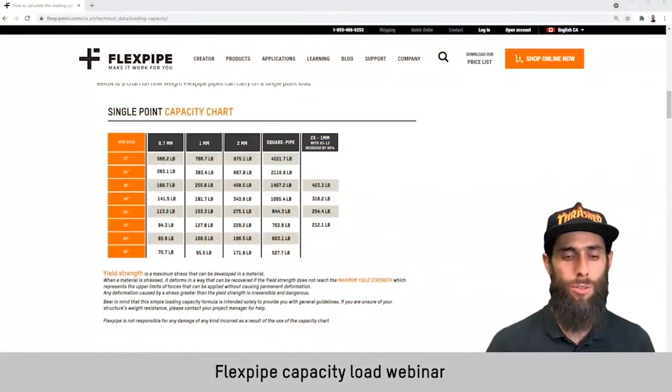So this is what we're trying to figure out using the new tool, which is the single point capacity tool, right? So here we can have the known length. It's all about how much information you have in order to be able to safely build, okay? So the more information you have, the better off you are. So square pipe, 1 millimeter, 2 millimeter, and then the stainless steel are the options that we have available.

So for example, length 48 inches, I press enter, and then I can see that I can hold 191.70 pounds on this particular length, okay? When I'm looking at an example like this, if this is my length, I need to figure whether or not I can maybe shorten this length in order to be able to add more weight, or is this length okay for the amount of weight that I'm using. That's kind of the basic 1, 2, 3 of that, all right?

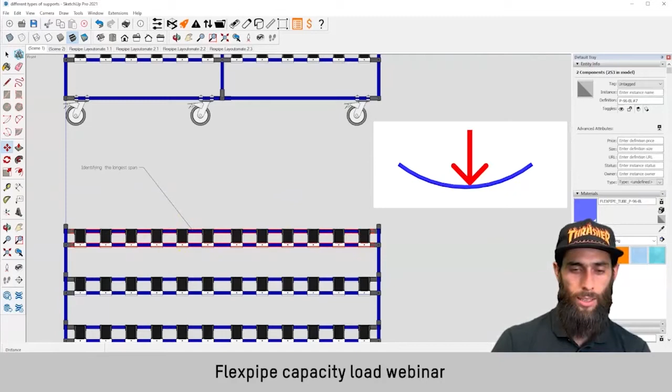So if we look at some of the structures, we need to understand what happens when we put a good amount of weight on the structure. So for instance, when we're looking at identifying the longest span, at such a long length here, it's very likely that those two pipes are going to begin to deflect and bend down on us. So we need to figure if the amount of weight that is going on top is okay for the two spans, or do we need to add more support?

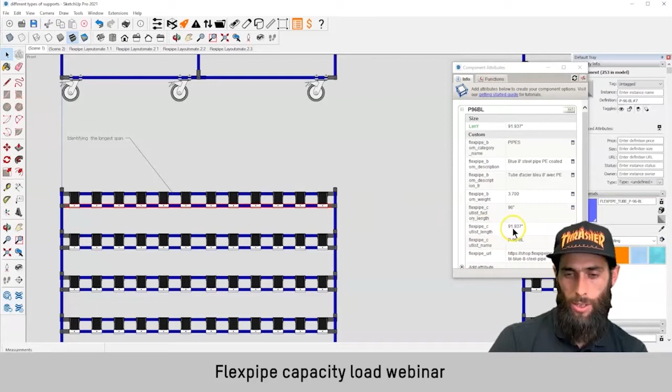So for instance, let's say I have 300 pounds that I want to put on top of this first level here, right? We're going to be feeding boxes. Eventually, it's going to get up to 300 pounds. So first thing I want to do is open up my component attributes. I'm just going to click here to see whether or not that is possible. So right now I can see that the length here is 91.937. So if I type in 91.937 and press enter, we can see that I can hold 100 pounds.

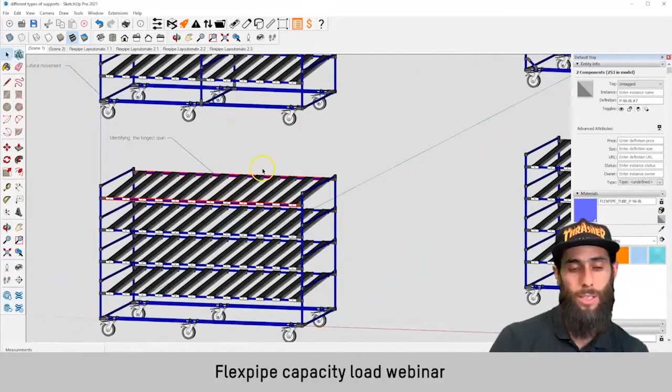All right, so let's go back to that and see what that means. That means that right now I'm able to hold 100 and 200. So right now I can hold 200 pounds in this particular setup. But again, we're talking about holding 300 pounds, so it's not going to be enough. It's not adequate enough for me, okay? That means that I got to think about something. So my next thought is, do I have the space to add another section? And by doing so, we now have shorter spans to hold that particular amount of weight.

So in this case, now I need to check what the length of this one is. And this is 44.5, okay? So let's look at what just happened. We grabbed the long span and we divided it in half so that now we have 44.5. So let's go here and type in 44.5, and then we can see that we have 206.78 pounds that we can hold in this particular length, okay?

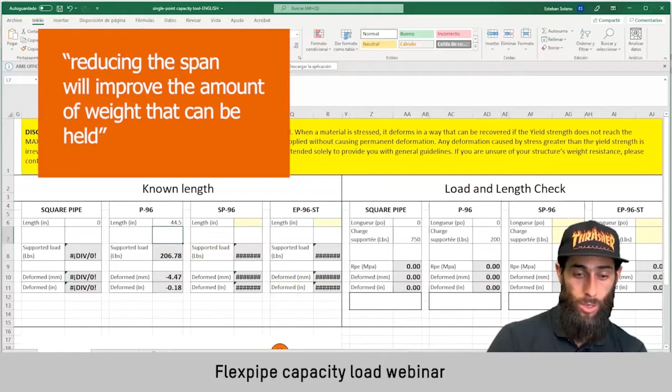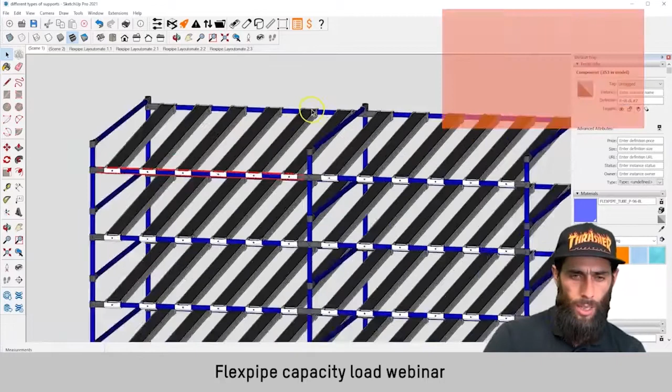So what does that mean? My original thought was that I wanted to hold in this top section here 300 pounds. So now that I know that, I can grab the 44.5, let's type it in here, 44.5, and we can see that we can hold 200 pounds, all right? So if we go back to that structure, remember, we're still dealing with 300 pounds that we want to put on top of that, okay?

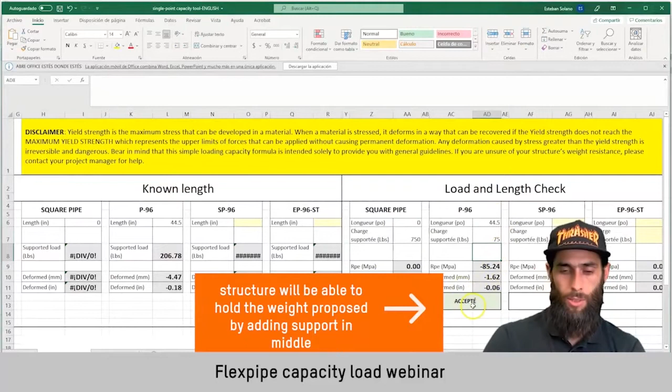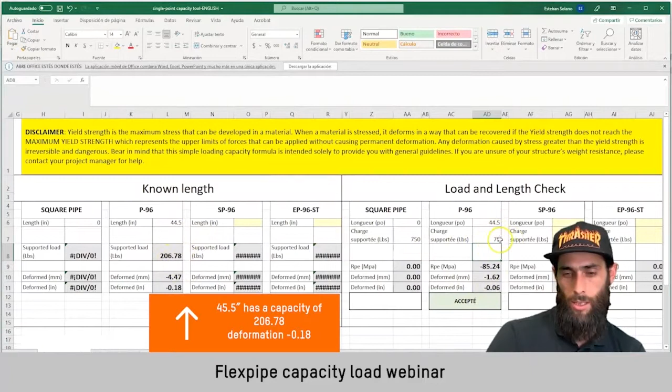So now we're going to divide 300 pounds into, let's see, 1, 2, 3, and 4. So 300 divided by 4, and we get 75 pounds. So essentially, each one of these will be able to hold 75 pounds. And we are definitely sure that 44.5 can hold 75 pounds, right? So we're definitely well beyond what is accepted. Remember 44.5, the maximum is 206 pounds, and we need a 75 pound weight load for each one of these sections here.

Okay, so in this scenario, we checked in okay. It's just more or less now, what are we thinking? Okay, so what if there is 300 pounds on this one? What if there is 300 pounds on the second, on the third, and on the fourth? Okay, so that is 3, 6, 9, 12, right? So now we're talking about 1,200 pounds in total. So that is a lot more weight than just the 300. So what does that do to the overall structure?

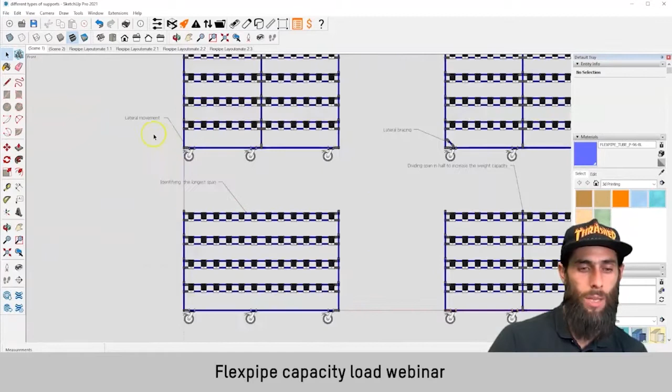Again, if we have a good amount of weight, chances are that the structure, if it's a mobile structure, is going to want to move from left to right. So one of the things that we can think about there is maybe adding lateral bracing in order to be able to create some kind of bracing to prevent it from wanting to move left to right, such as the case here. This is an example, right? We're using a short, tight angle here in order to keep those two from wanting to move away from each other, okay? That is one thought.

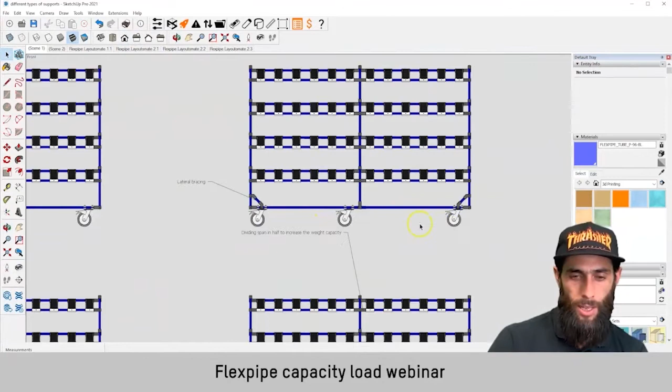Another thought is also to think about what happens to that weight front to back, okay? So that weight now, if we wanted to move it, there's a good chance that it's gonna wanna move the structure front to back with a good amount of weight, okay? So again, we're using diagonal support. So we're using a pipe in the middle along with the diagonals here to basically prevent that from wanting to move back and forth.

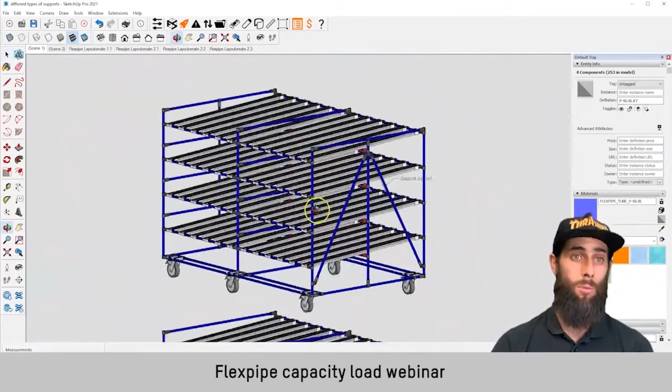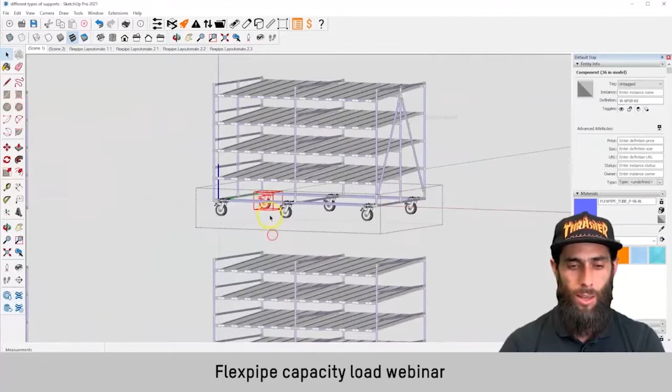And then if we have a closer look here, we also added a pipe in the middle, which can only re-emphasize what we already know to be true, that the structure itself is going to be able to hold that amount of weight. Now, the final thought is, can all of this weight be handled by the casters I am using in this particular scenario? That is really what we need to understand. In this case, yes, we have casters that can hold 500 pounds each. So we have 1, 2, 3, 4, 5, 6 casters. So yes, we can hold that amount of weight.

Another option here would be to maybe think about using the bottom base here instead of using the standard tubing, right? So right now, the pipe that we have here is the 1 millimeter. So perhaps if we look at that dimension, 91.37, and then we have smaller ones here as well that are going to also have a good amount of weight to carry. So let's look, same thing, right? 44.5. Let's have a look and see what 44.5 can hold on the 96 and then what it can hold on the 2 millimeter pipe. So basically we can hold 374 pounds on that 44.5, right?

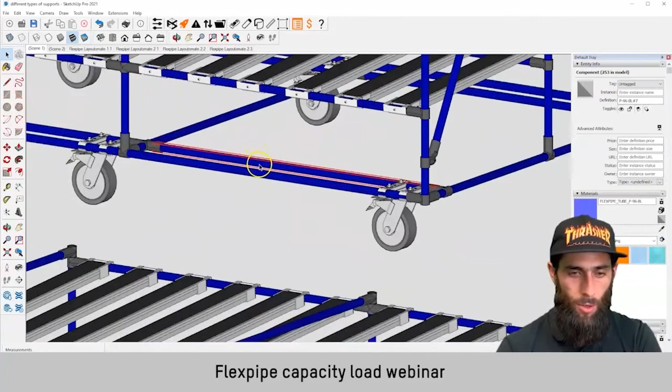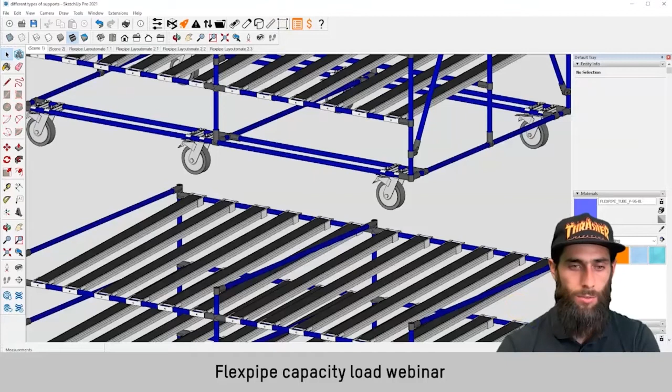So let's go back. So 374, 1, 2, 3, 4. So 374 times 4 gives us 1,496 pounds, okay? So we can hold the amount of weight that we need to. Maybe it's a matter of changing that bottom section of this particular structure here. Let's zoom out. So do we need to consider adding the 2 millimeter base in order to strengthen the overall integrity of the cart? Things to think about there, all right?

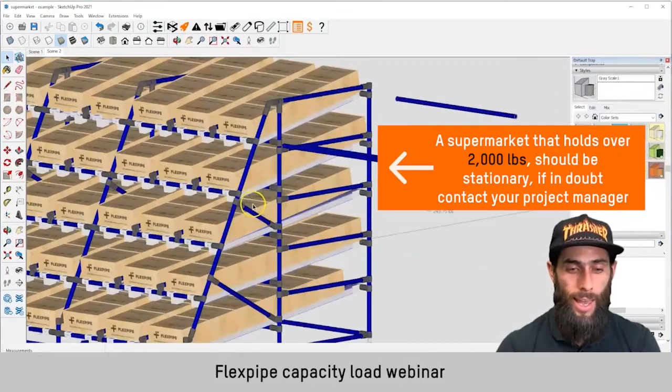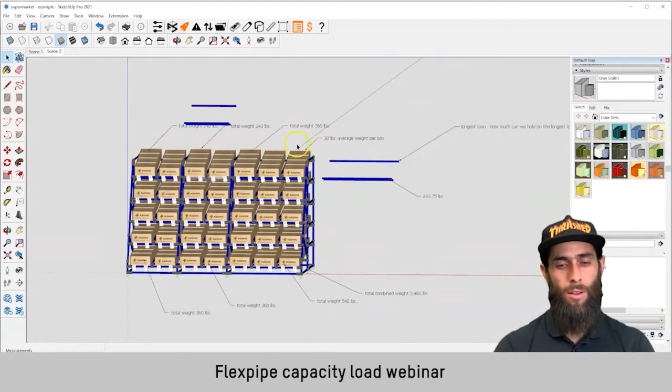Let's go ahead to another example that can be commonly seen. Again, this is the supermarket rack that we have here. It's been about 10 years and it's still here, hasn't moved an inch. It's stationary, it's got diagonal support, and it's basically not going anywhere anytime soon. So for us, each box can hold about 30 pounds on average. So we have three separate sections in this one here. Again, 360 pounds, 240 pounds on the first layer. It's a good amount of weight, so we need to figure out how to distribute that.

So in this case, we're using the longest spans, and we have 3 of them that we need to work with, okay? So 3 spans, and simultaneously using the component attributes from the window here. So we can see that 243.75. So 243.75, I have a total here of 360 pounds, which I need to account for. So I'm going to come to the calculator, because what I want to do is figure out how much I need to divide, right?

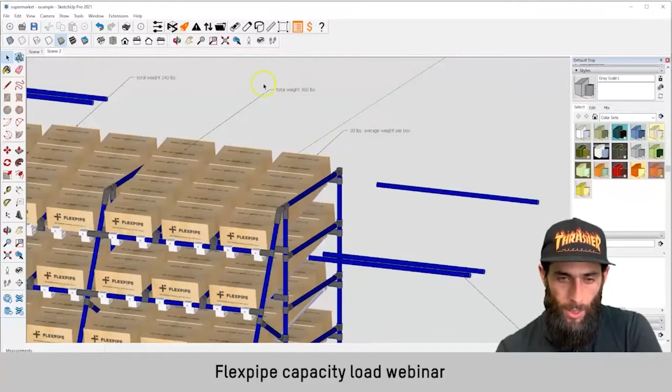So let's go back. Let's look at this here. 360 pounds. I want to divide that into 3 spans, right? I have 3 total spans in which I want to hold that amount of weight. So here we go. 360 divided by 3 gives me 120 pounds. Okay, so if I go back, I understand that I'm well within what I'm capable of doing, right? So here I can put 120 pounds.

And actually, let's go back just to make sure that that's the right dimension. Let's go back here. This dimension here, I believe it's 37 3/4, right? 37 3/4. Okay, so 37.75, 120 pounds, accepted. Okay, so in this case, the thought process, what I'm doing here is, can I hold 360 pounds on 3 lengths of pipe? The answer is yes, I can.

Okay, so if we just go over what we just did, we divided 360 pounds by 3, which is the number of spans that we have, which gives me 120. So again, if I typed in my weight in this case, 120, I get the accepting green light. All right, so that's good for that one there.

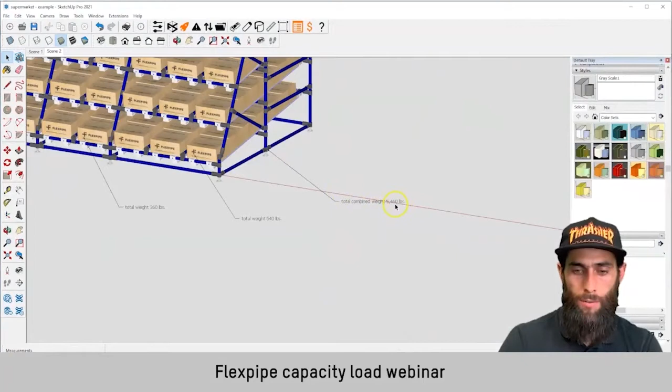Okay. Same thing. So let's see, what does that mean on the bottom? On the bottom, again, we have a total weight of 5,460 pounds. All right, so that is a good amount of weight. If I'm looking at the bottom total weight, 540 is the main section here, which I want to make sure that I can hold. So again, I look at that long 37 3/4, and I divide 540 into 3 spans, right?

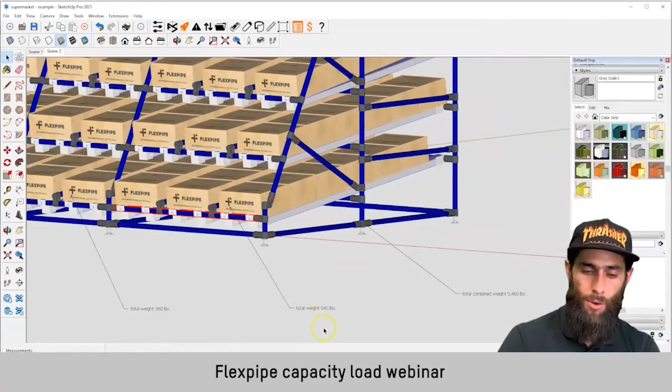So 540 divided by 3, 180. So if I go back to here, let's type in 180, and again, we have the go green light for that one. Okay, so that's how we utilize that single point capacity in order to understand how much weight we are capable of holding in any given structure. Again, the more information you have, the better off you are.

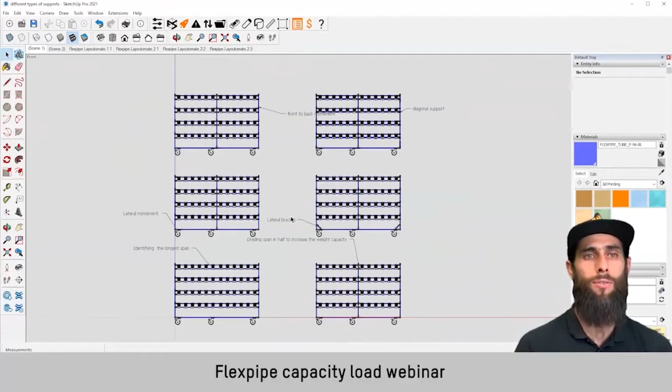So sometimes if we think about the different types of situations, we need to think if we have a particular footprint that we're restricted to. So therefore, because of a certain dimension, we need to figure out how to reinforce the structure with maybe angles. Maybe we don't have the space to add support, so we need to think about adding angles instead. Okay, so those are the type of situations in which you need to ask yourself how much footprint I have and how much can I get away with within that particular amount of space.

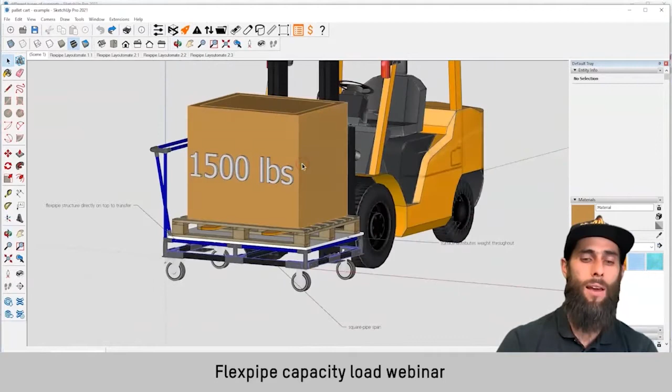All right, let's look at another example here. Again, this is a forklift pallet cart. So we have a forklift placing different kinds of weights, for example, up to 1,500 pounds for this particular situation here. What I need to think about is, is it a good idea to add square pipe in this situation? Okay, so maybe not a bad idea if we're dealing with a pallet cart which is getting beat up, it's getting bounced around, gets used a lot. So maybe the square pipe might be the option for this particular one here.

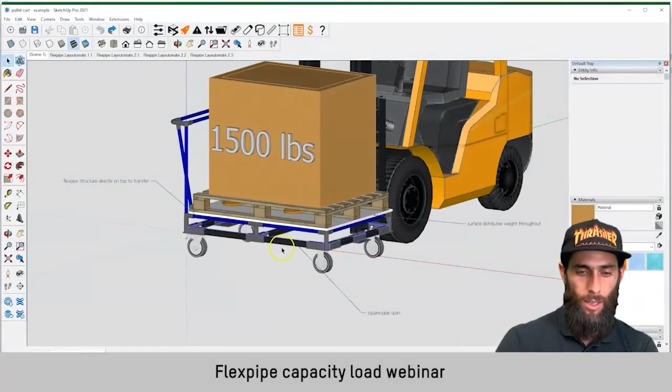So if we look at the dimension of the square pipe here, let's just drag it down and get a quick measurement to see what we have. We have 44 1/4. So at 44 1/4, let's look at what the square pipe looks like, 44.25. So 1,138.44 pounds is what we can hold in that particular pipe, which is a ridiculous amount of weight. So that means that I can hold well over 2,000 pounds just on those 2 pipes. But most importantly, can the rest of my structure also hold 2,000 pounds? So this is what we need to look at now, okay?

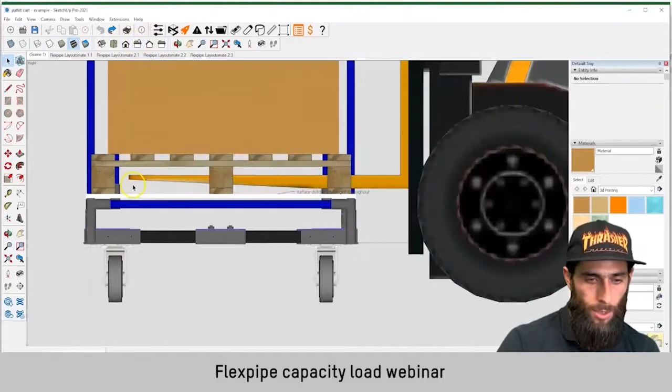So in this case, let's look at this from the side here. We have a surface that is going to be getting fixed to the Flexpipe section of this structure. And then we can see that that Flexpipe section is exactly right on top of the connectors for the square pipe. So there is no play there, right? That's all one solid compact piece there that is working together. All right, so we're very, very solid in that sense. So now my question is, how much can these little spans hold, right? My main emphasis is, can my longest span do what it needs to do?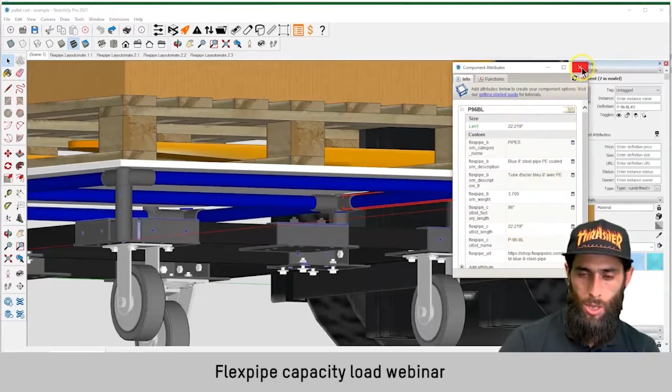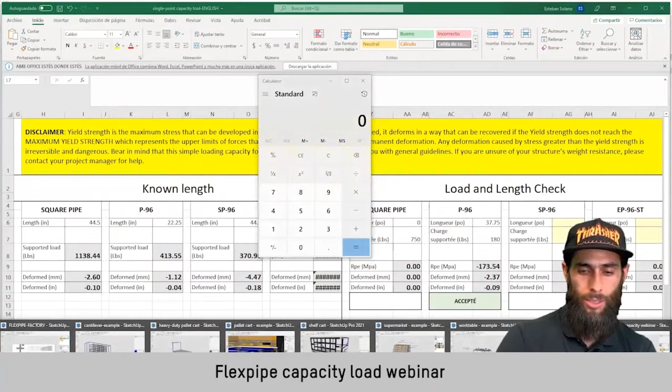So let's look at this dimension. Component 22.21, so just under 22 and a quarter. So let's go ahead and write here 20, well, this is what? This is a regular pipe, 22.25. So we can hold just over 400 pounds. So imagine 413. So 413 times 4, 1,652 pounds is the exact amount of weight. So if we go back to that structure we're dealing with, which is the one over here, then yes, we are more than capable of carrying those 1,500 pounds.

Okay, so now in this situation, things that I would think about is this surface here is going to basically distribute that weight throughout your structure, right? It's not going to be just on one particular point. So that's something to think about.

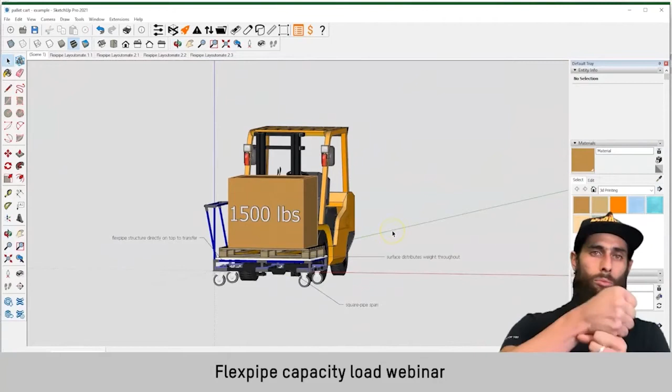Also, something that I want to mention here is the handles here, right? So we can see here that we've added an angle on the front part, and we've connected it to the actual structure here. Think of when you're holding a flag, right? If you're holding a flag on one point, it's going to be very easy for that flag to move. But if you hold it in 2 separate points, you're going to have a more stable hold of that flag. So that's what we're doing with handles. If you can have more than one point to fix it to, you have a good solid triangle in this situation here, in order to have a solid handle to push all that amount of weight.

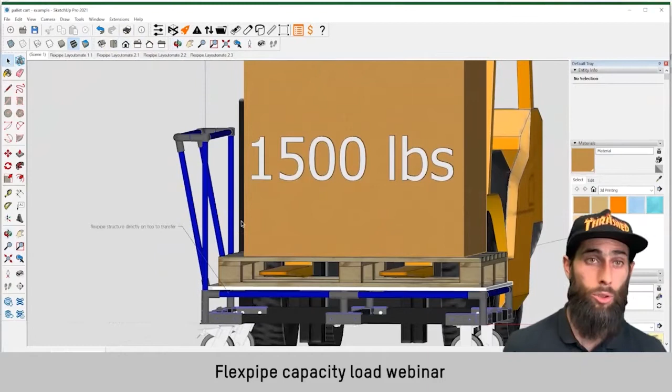Another thing that you may want to consider if you're dealing with heavy weight is perhaps offsetting your casters so that you can get a little bit more play when it comes time to spinning this structure around, right? So when it comes time to pivoting this structure, you're going to have a better time doing so if there's a lot of weight, if you offset the casters just a little bit so that you can give it a little bit more torque in that initial turn. Okay, so that's something to think about when dealing with pallet carts such as this one here.

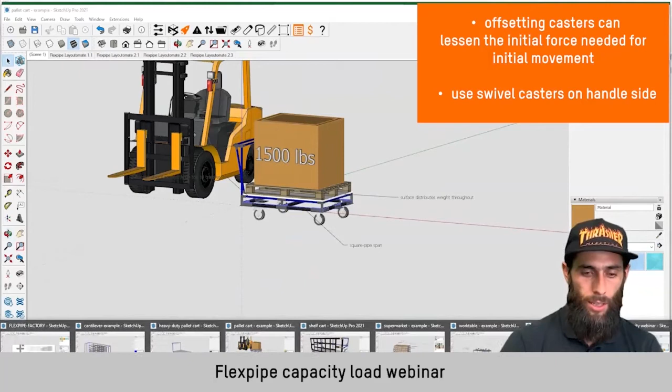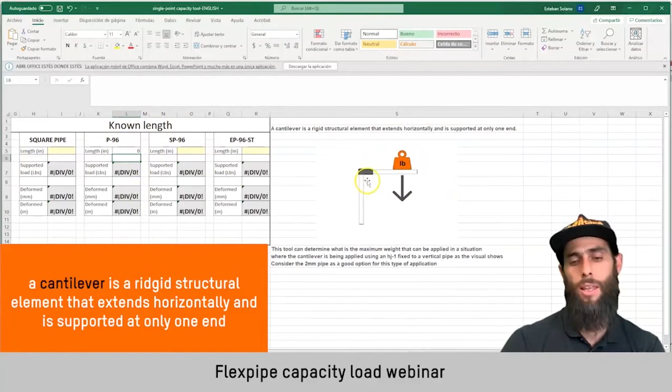All right, let's have a look at another example. Let's look at the cantilever example, right? This is something also that we have available, and that is the cantilever capacity. So again, we're just going to type in the known length and understand how much we can hold. The way that works is that the HJ1 is fixed to a vertical pipe, and then the second tube is extending from that one there, and that's how much you can hold in that particular one.

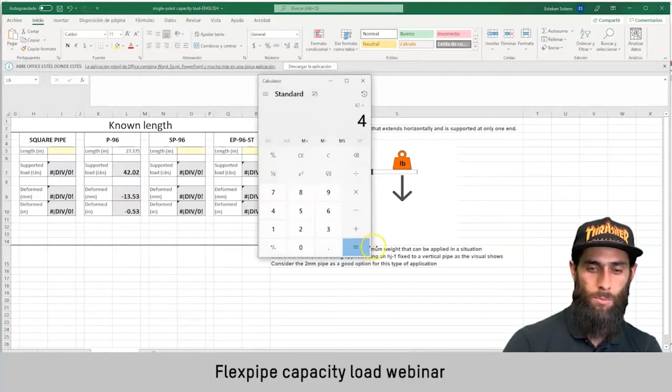Okay, so for instance, in this scenario here where we see these wingspans, we're going to hide these here, and we can see now the actual length of our pipe. Component attributes will give us the length, 27.375. Let me go back to my cantilever, and here we go, length 27.375. And now I understand that I can hold 42 pounds on that particular one. Okay, so 42 times 4, 168. Why 4? Because there are 4 cantilevers in this section here, right? 1, 2, 3, and 4. All right, so that means that we can hold 168 pounds on that particular section there.

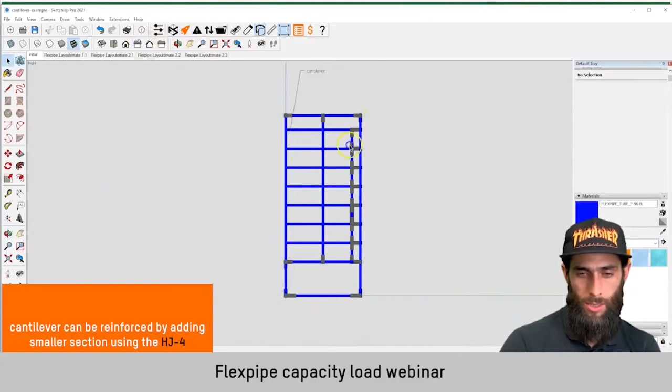All right, and if we think about what we're doing in this situation here, we can see that all of those cantilevers are being reinforced with these shorter, smaller pipes that are being added with all these connectors here. Okay, so that is going to create a really solid hold for those cantilevers. So again, something to think about when dealing with the cantilevers, and that's it. It's just about putting the known length in the capacity chart here in order to understand how much you can hold.

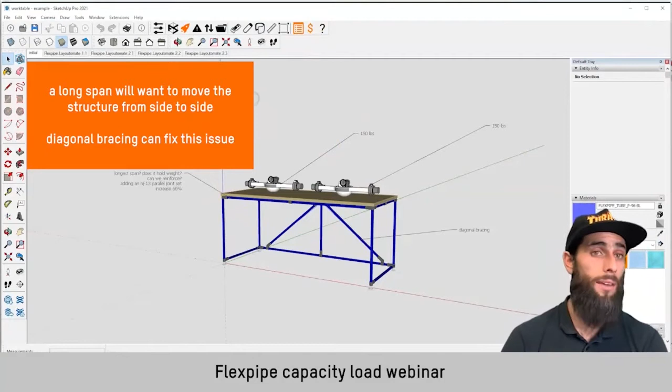All right, let's go to another example. Work table. So maybe it's a work table that you're dealing with, right? It could be heavy parts, a part that has many different components. It could be motor parts, car parts, a lot of different things that can get heavy if you're dealing with those types of parts, right? So in this case here, just an example, I have a couple axles here. Maybe they're 150 pounds each. So I just want to see how much we can hold together, okay?

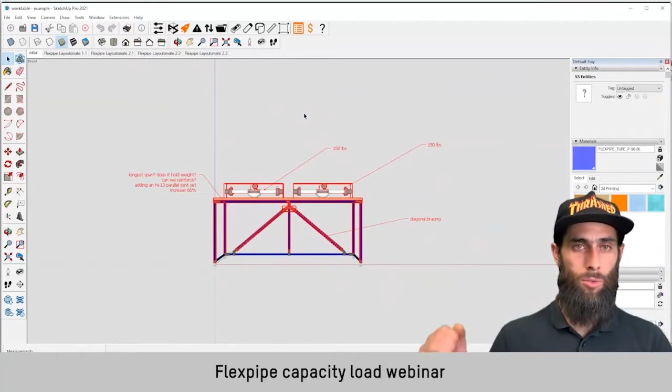Again, what am I thinking about with a work table like this is we're adding diagonals so that we can support that weight, right? We don't want that weight to be moving left to right on us. So when you have a longer span, most definitely that structure is going to want to move on you. So again, think about adding a support in the middle and having angles breaking away from that to attach to the corners to distribute the weight and to hold it in place, all right?

So maybe my work surface is going to require a little bit more strength. I beat it up a lot. So sometimes it's a good idea to think about reinforcing it with an HJ-13 and adding a parallel pipe to it. So to show you what that looks like, let's go back to our section here where we can see by adding an HJ-13, we increase the capacity by 66%, all right? So what does that mean to our structure?

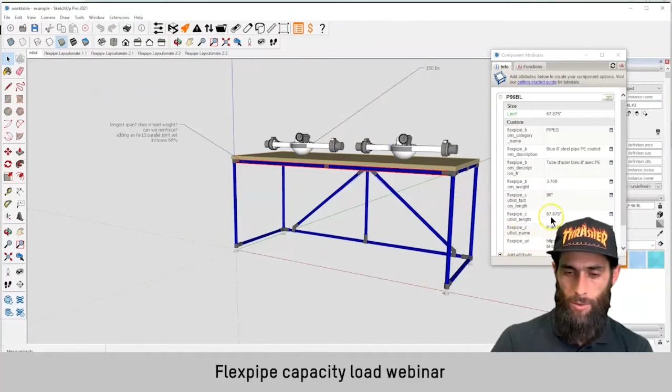Let's go back here to determine, first of all, what length we are working with. So component attributes, and I'm just going to select here 67.875, type it in, 67.875, and we can hold 135 pounds. But if I needed to beef it up a little bit more, then I know that I can go ahead and think about adding an HJ-13. So let's go back to that drawing.

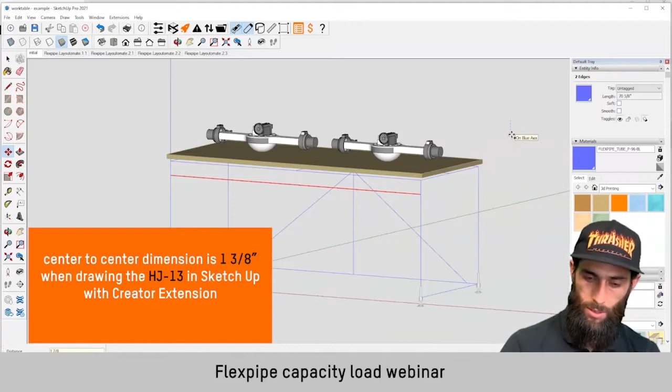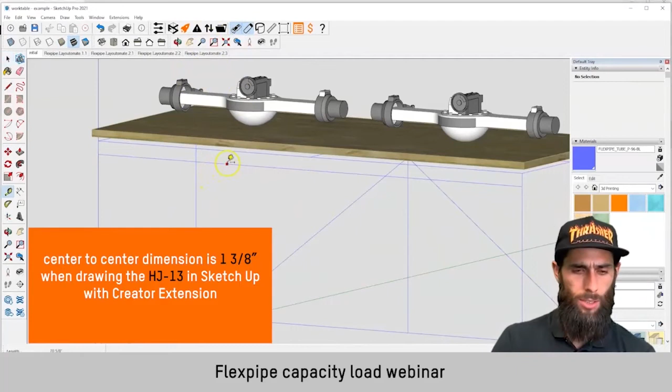And real quickly, we can hide all this here, and then we're just going to go ahead and add another line. So we're going to grab this one here. We're going to make a copy at 1 inch and 7/8. And then from there, let's go ahead and put a... Oh, I made a little mistake here. 1 inch and 7/8 is the HJ23. What we want is the HJ-13. So that's actually 1 inch and 3/8. So let's go back to the original one, making a copy, 1 inch and 3/8.

And then here we go. So basically I'll grab this one here, and let's get rid of these surfaces. And then that's it, guys. So what we did here is basically add another pipe in the front, and we're joining that with the HJ-13. Okay, so basically we now have 135.57 pounds. So if we take 135.57 plus 66%, then we can now have 225 pounds resting on those two pipes there.

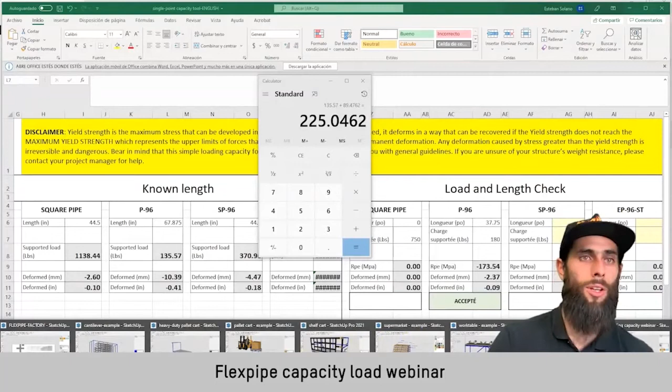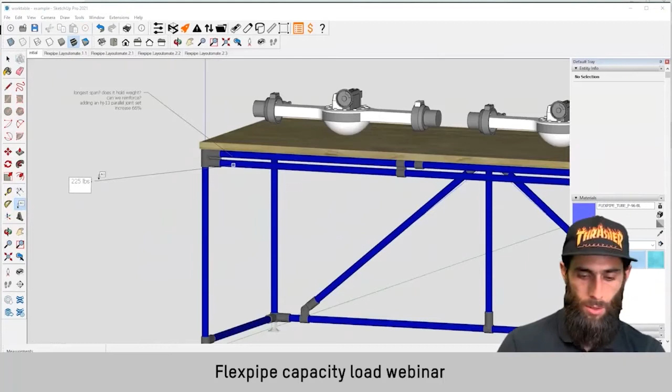Okay, so now we went from the 135 to 225. So now by adding the HJ-13 and doubling up the pipe, we can now hold a new number, which is going to be 225 pounds for this particular setup here. Okay, so not a bad idea. So think about that kind of situation when you're dealing with a work surface where it's getting a lot of things dropped on it all the time. So it's not a bad idea to go ahead and throw a parallel, an HJ-13 with another pipe, just to reinforce that particular area there.

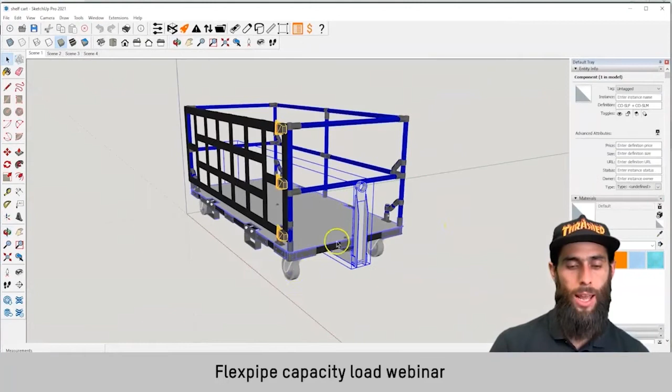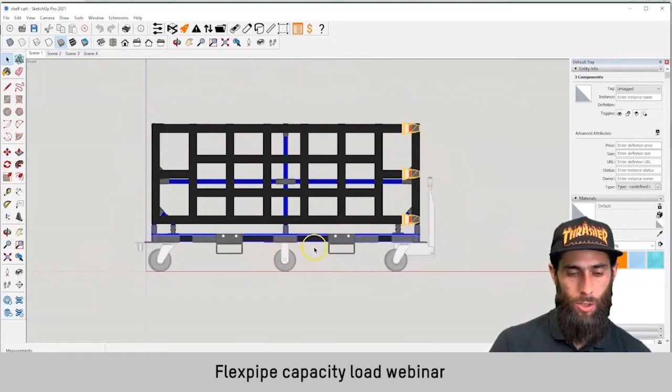All right. So let's have a look at this transport cart. Again, if we're dealing with transport carts, it's not a bad idea to think about adding the forklift pockets to be able to also work with forklifts. Transport, we're dealing with perhaps tuggers or whichever of the situations that you may be dealing with. In this case, what we're trying to emphasize more than anything is that we're going to be using a transport cart for very heavy parts, very random parts, but we've emphasized the structure with the square pipe.

Okay, so basically I know that at 68, let's see, so that's 68 15/64. So let's just call that 68 inches. 68 inches gives us 745 pounds that I can safely put on this particular structure here, right? So right now I know I have 1 and 2. Okay, so those are my 2 main spans that, like everything else, I'm re-emphasizing: can I hold the amount of weight I need on that long span?

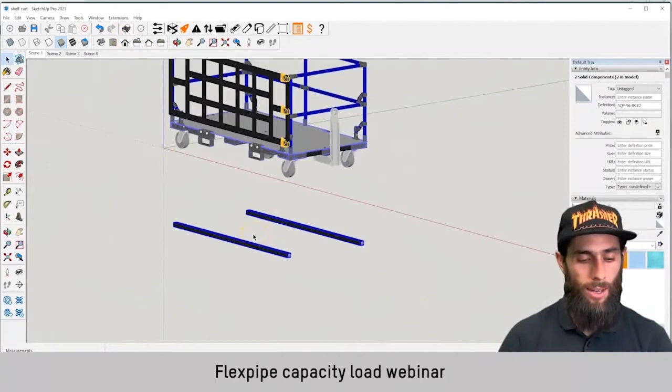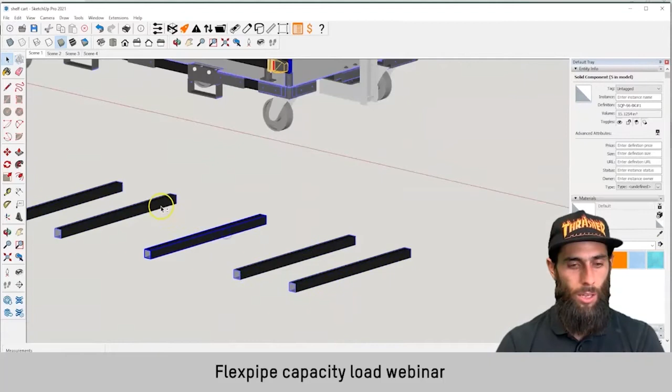If the answer is yes, then everything else in that structure essentially is going to be only reinforcing the initial weight of what our longest span is holding. So that means that all these other parts that we're looking at here are only going to be reinforcing everything we have already stated, all right? So that is the idea with the capacity chart, is to understand if your longest span can hold it, and then from there break it down into whether or not you need to add another section, add an angle, add a brace, and those types of setups, okay?

So let's have a look at the last one here. Again, we're just re-emphasizing how much to put on, okay? So the amount of weight on these 2 bins, what does that mean on the particular amounts of spans? And then again, what does that mean on the particular type of casters or feet that we're using? So maybe I have a total of, let's just say that here, we have 60 pounds. Let's type in 60 pounds, all right?

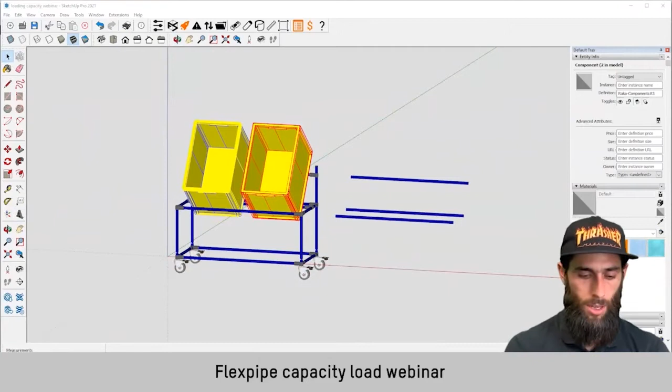So we're gonna say this one here can hold 60 pounds. And same thing over here, right? So we need 120 pounds. Can we hold that there? The answer would be most likely yes, right? Let's look at this. Component attributes, 42.25. Again, 42.25 tells me that I can hold 217 pounds just on one.

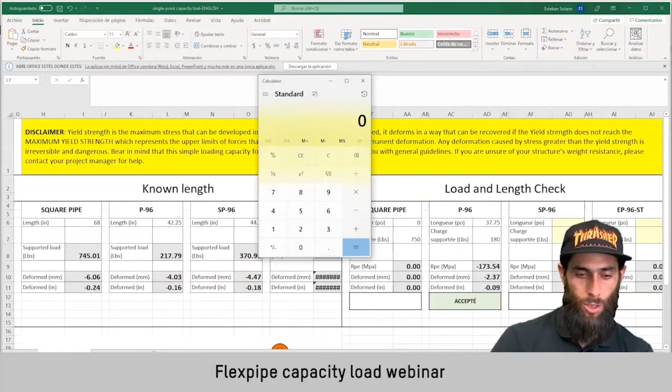So again, if we're dividing the structure that we're looking at into 3, we got 120 pounds and we want to divide it into 3. Okay, so 120 divided by 3 gives me 40 pounds. So basically I'm going to be distributing all of this weight into 3 pipes, and each of them can essentially hold more or less 40 pounds. Okay, so green light go for that.

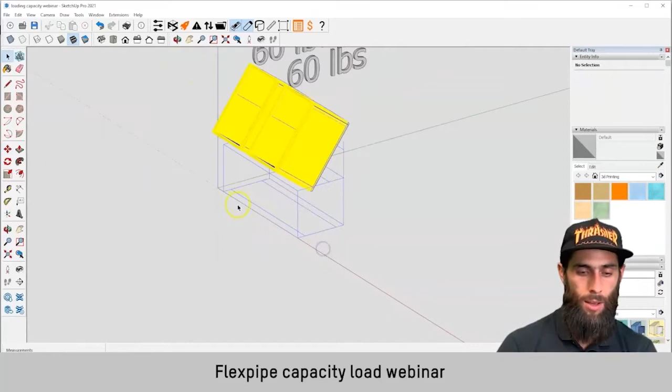If it's more weight, then this is probably not going to be the good scenario where we have stem casters, so we might have to get rid of those. We may need to go ahead and add the plate casters, right? So maybe now our setup is going to look a little bit different. So maybe now we need to think about adding the plate casters that are going to basically give us the ability to put more weight on the rack that we're using.

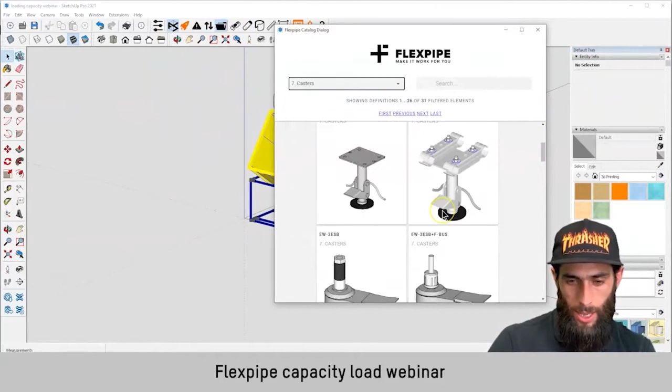Okay, so for instance here we go to casters, and then I'm just going to drag and drop one real quickly here so that we can look at the casters. All right, so let's first look for the BC4, BC6, and then caster wise, something like this. Let's look at them together. So there we go. So maybe something like this is going to be the idea.

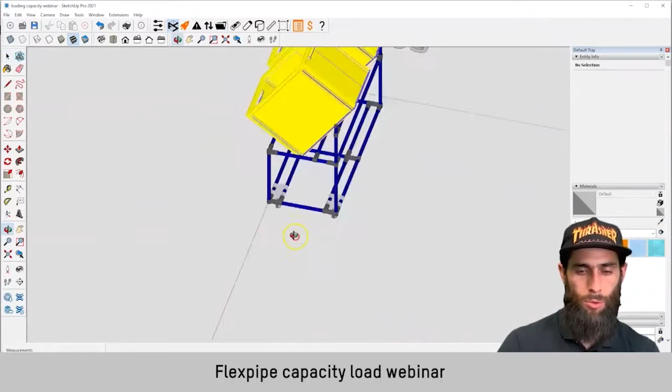Okay, so instead of having stem casters, maybe now what we need to do is add the different plate casters to be able to distribute the new weight that we're dealing with, but in a more appropriate way. Okay, so maybe those are fixed, or if you need the swivel, then we just go ahead and look for the swivel casters as well. And here we can look for the swivels, and having a tough go at it here. Maybe if I open it up a little bit more, or perhaps we can just drag and drop these in for now, just to show you guys what that is going to look like.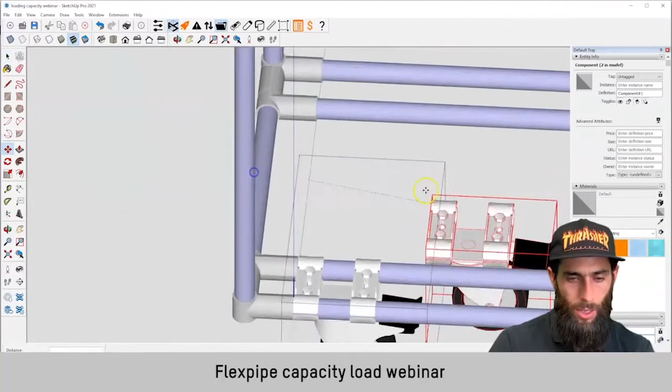Okay, so maybe for this one it might be a better idea to do the casters like this, so that we can now look at that like that. Okay, so now what did I do, guys? Let's see, let's just get rid of those and we'll make a copy of these, and bring them to the opposite side.

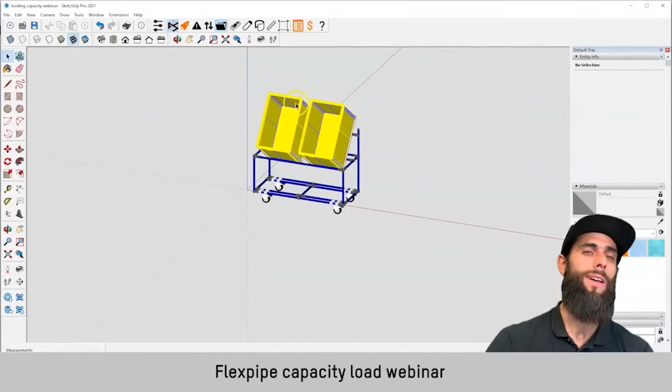Okay, so why did I change the casters, guys? Because maybe now, instead of being 60 pounds each, maybe they're 150 pounds each. But instead of them being positioned diagonally, they're just going to be placed flat. So again, I'm thinking about what's happening to my structure in real time. I'm beginning to realize that I need to put these in this scenario so that now they can be flat. Now I know that I need to extend my structure.

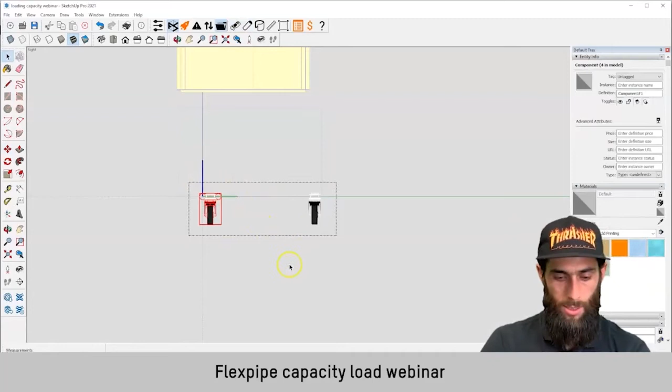So there we go. So we can say 5. Same thing here. We're gonna move this 5. And then same thing, right? We're just gonna essentially put everything in its new place to be able to carry a new amount of weight. Okay, so now we're going to generate this structure just to see what it looks like in its new form. And then we need to think about perhaps adding this one in the middle, or rather adding one there, one here,

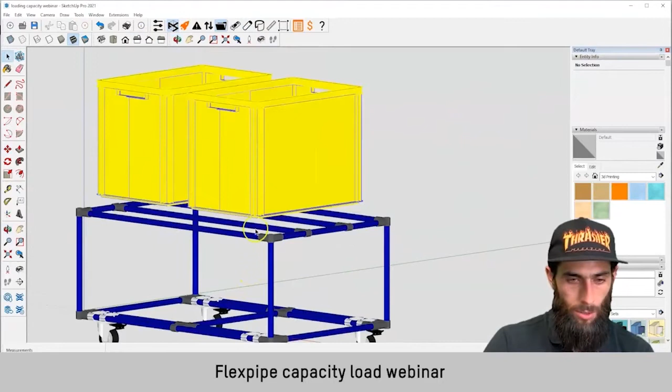and basically what we're doing now is we're going to check to see how much we can hold on this one here, like so. Okay, so the idea is that maybe I could shorten this a little bit more just so that it actually sits right on top of the pipe.

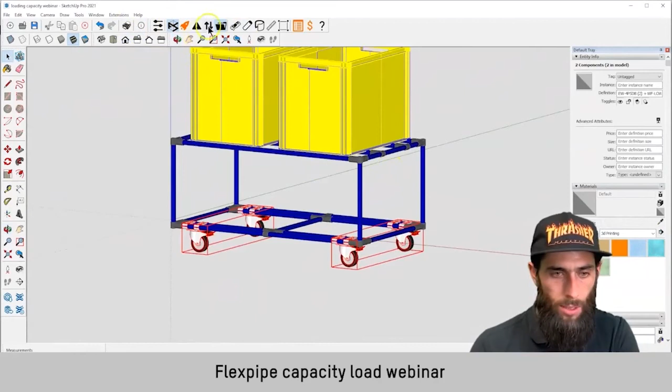So I say yes, and then we just move this to 7/8. There we go. Okay, so now we have 200 pounds on, or rather, let's say 150 pounds on each. So now 100, which brings us to 300 pounds. We're okay here, right? We've changed the setup. We've added plate casters, so now we can take care of that weight. And then we are going to check with the component attributes here just to see how much that is, 44.25.

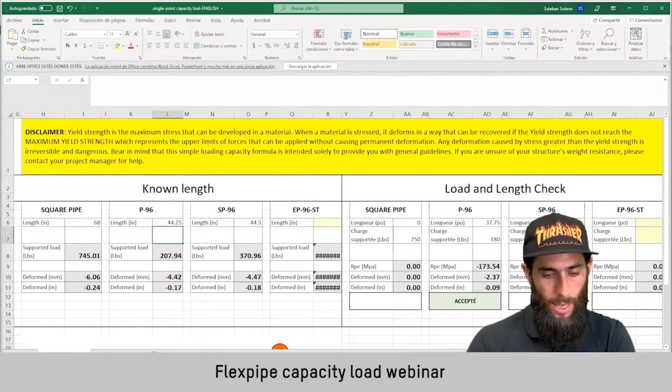So 44.25, 207 pounds. Again, if we're saying, for example, we have 300 pounds here, and we're going to divide that into 1, 2, 3, 4 pipes. Okay, so that's it. So it's going to be 300 pounds. So 300 divided by 4 gives us 75 pounds. So at 44.25, 75 is more than okay. Okay, so that's the idea when dealing with any type of structure.

Okay, we're using the capacity chart. We're also going to be referencing the learning section, right? We have the capacity chart there as well, which also lets us understand how to establish your loading capacity, which is what we just did. So basically you take the longest span and you divide it by the amount that you need, if that's the case, or if you need to shorten it, add angles, bracing, and things like that. That's part of the remaining part.

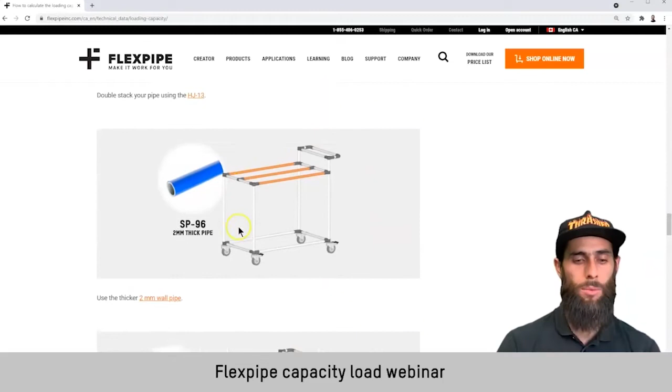Okay, now from there we need to make sure that the structure itself is able to hold that weight, meaning if it's on casters, you've got to make sure that the casters you're using are the ones that make sense for your type of structure. Okay, so re-emphasizing, we're either going to add support in the middle, we're going to add support angles, we're going to add a parallel joint, or we're going to be using the 2mm pipe. All right, so those are the main setups for the type of structures that we want to be using and building. It's basically about making sure that those are going to be able to hold based on all this information that we did here.

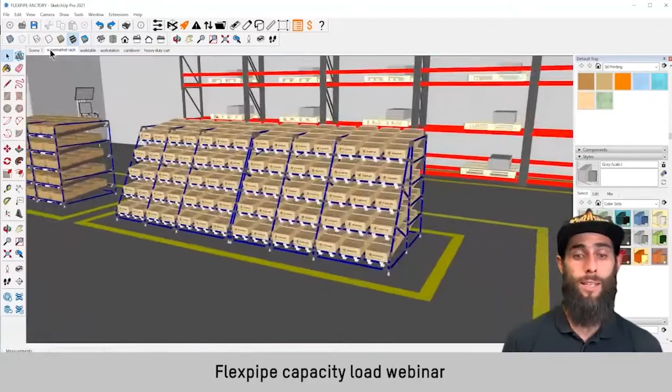Okay, so one last look at our Flexpipe factory. So again, whether it's a supermarket rack, whether it's the work table, whether it's the workstation in which perhaps you need to hang something on the roller here. Maybe it's about creating some kind of a part that is going to be hanging. It all really depends if it's a cantilever, or again, if it's the heavy duty cart. All of them are being thought of in the same way: what is my longest span? How much weight do I need to hold? And what do I do from here?

Is it okay? Do I get the check, the green light with the different types of inputs and the dimensions I'm using? And if not, then do I need to shorten it? Can I shorten it? Can I make it longer? Can I add more pipes? It all really depends on what you're trying to do.

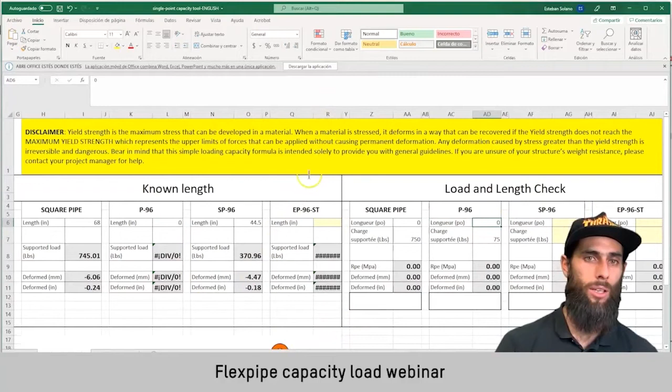But the main gist of it all is to be able to understand what is your longest span and how much that can hold. And from there, everything else is going to, again, re-emphasize what we know, which is that the longest span can hold based on this particular chart, which is going to essentially just give you the very basic number, right? Anything more than that, you're going to need to have an engineer and a good amount of time to figure out what each section of every structure is going to do, okay?

So from here, we're now going to jump to the live on the floor section. I'm going to be joined by Joe Holmes, and we're going to talk about everything we just did on the software, but now we're going to be doing this on the actual shop floor with some real structures. So again, I'll see you there for that.

Good. Right on. Okay, guys, so we're back here on the floor again. Thank you guys for hanging out for the presentation there. Again, it's just a very simple tool. We're trying to break it down to the simplest way we can understand it.

So again, first of all, let me introduce my partner in crime, Joe Holmes. He is my guru, if you will. Everything I've learned is from him. So I'm always excited to have him around and basically learn as much as I can whenever he's around.

The spans, remember, that's the main thing.

Look, if we have a look here, we can see this is a 1 mil. We can see that this is moving. We can see the 2 millimeter is going to be a little bit harder to do. And then we can think about what's even going to happen when we grab the two together with the HJ13.

Okay, so let's talk about this structure here. Again, this structure here, we're looking at 6 feet by 48. So we got a 72/48 here. Again, we need to figure how much we can put on each one. So just to show you an example here, this is about 40 pounds or so. So I'm just going to lay it down just so you guys get an understanding of what's going on.

Okay, so we can see that there is a certain amount of deflection. So that's what we're trying to figure out. What is natural deflection? Will it go back to its original form, or will it be permanently damaged? So my thought process, Joe, is this: can I hold it on 1? Can I hold it on 2? And then why not, as a safety net, safety factor, maybe we can add a third one in the middle just to make sure that we are in the safe zone, if you will. What do you feel about that?

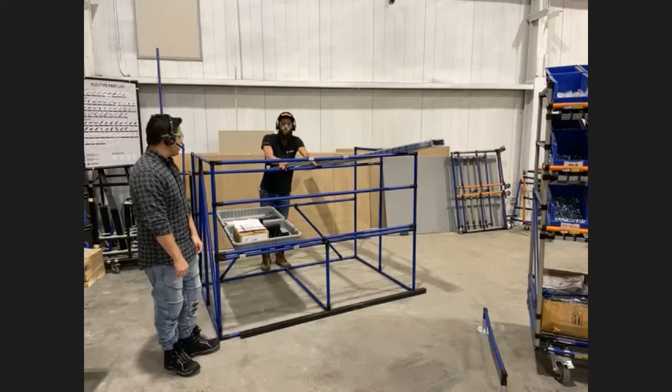Right on. Just want to make sure we can see this one here. We're able to show that one in the middle there. So again, right now, if we look at this, it's basically resting on the front and on the back. So imagine a situation where we're actually going to be using our flow racks. So now we're going to have our flow racks coming in. So they're going to be sitting on the top portion here, just to show you guys more or less. So now we've added a safety, because now we have this one in the middle that is making sure that these guys do not bend, especially with, like Joe said, long lengths where they want to begin to kind of twist on you.

Another idea, right? This is the union. Yep. So we can add this to your center, and then you can go ahead and fix directly to your pipe, and you're sure that this is basically going to be reinforcing what we already understand, which is just to make sure that that span works.

Okay. So real quickly, Joe, when we're dealing with wide structures, we're thinking about maybe adding a support in the middle. So a lot of people will ask, at what length do we want to think about beginning to add supports in the middle? From experience, we tend to keep any rack at a maximum of 6 feet, so 72 inches. Longer than that, you have a deflection even before you put some weight on it. Right. Yeah, we can see that. Very minimal, but once you start adding weight, on the Excel chart, actually, you guys will see that it'll tell you what the deflection will be in the pipe. So that's like a general rule, just for safety for everyday people, not necessarily engineers. So about 72 is the max.

My background is a woodworking background, and I always think about studs. I look at the structures like they were houses, and I always think, let's start to spread them out, right? So in a span of 6 feet, depending on what you're doing, you may have to throw one. When you're at 8 foot, for sure, you're gonna want to think about dividing that into equal spaces. An important factor is if we have the ability to do so, right? Correct. If the structure allows us to do so. But perhaps you have a structure in which this isn't allowed because you need access, then you need to think about other options.

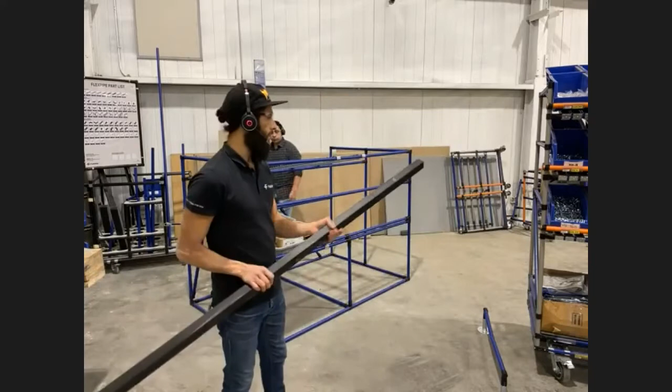And then the other option would be, now if 2mm is not adequate enough, then we can go ahead and now begin to talk about what is the square pipe, okay? And the square pipe here is, let's just say, as heavy as it gets, right? So in your experience, Joe, what type of structures do we normally see being made these days with the square pipe? More often than not, actually, it's mostly for platforms, for transporting pallets and whatnot.

Another very common cart rack that we would do, once again, it's for the base uniquely, is for larger companies that travel between one factory and another. You know, like the aerospace, they have a lot of partners for finishing products. Then you have the airplanes and whatnot. Right. So if it's going in and out of trailers, you want something that's as solid as possible, because more often than not, they will be manipulated with forklifts, and forklifts, they can do a beating on a rack.

Okay, so that's true. In the past we've had to think about it differently, and it's probably one of the main reasons why we've introduced the square pipe. It's because there is a lot of heavy forklift usage in your area, in your factory, in your place of work, and that's where we need to think about what Joe mentioned, because low platform transportation, that kind of all day up and down, would make sense for the square pipe.

And just to mention again, pretty soon we're going to be having the high speed 6-inch caster, and we're also going to be introducing the forklift pocket, I believe, that we're going to be able to slide into place in the square pipe. Okay, so again, that's great options for heavy duty. In the video we showed a pallet cart. It was pushing around 1,500 pounds.

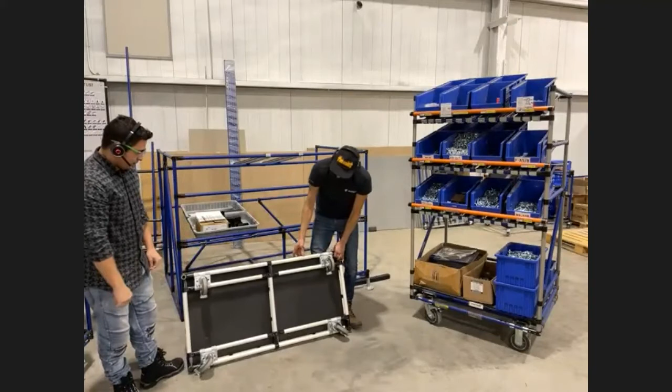Joe, here we're using a double parallel joint, right? Yeah, so here. We're setting it up. There we go. Good idea. So here, what do we have here? Joe, you want to break it down for us? We have a surface, which is again doing what? It's spreading the weight, right? Yeah, it'll help you spread the weight, but it's very useful when you have boxes and whatnot.

Like if we're talking about packaging, you have a lot of these small boxes, they're about 10 inches by 12 inches. But you can also set a platform on there. Let's say you don't want the surface, it's only for larger things, and just add a couple of parallel bracings, and you wouldn't need the surface. Okay, so we don't necessarily need a surface. Exactly, right? If you don't need a surface, get rid of it. But for what we're using here, maybe it's just the fact that it's different boxes, different items. So we just need something to be able to pull things on the fly, right, when we need to.

Because if you're having a large load, then you're adding more bracings, so more pipes, more connectors. It adds up pretty quick. Dollars here, dollars there versus quantity. So it might be that you're better off with the square pipe. Okay. So basically, you're saying that with square pipe, we can probably get away with 1, 2, 3, 4, and then just one in the middle, as opposed to having to double everything and then maybe even continue to add more depending on what that weight is. Correct. Makes sense. So again, check your budget, see what's available, and see if it's possible.